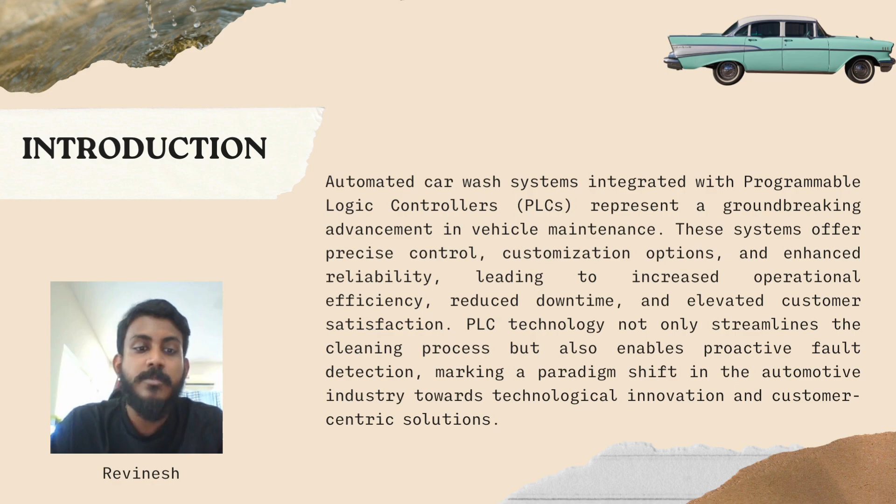PLC technology not only streamlines the cleaning process but also enables proactive fault detection, marking a paradigm shift in the automotive industry towards technological innovation and customer-centric solutions. Now I'll be talking about the problem statement of this system and scope of study.

For the problem statement, develop an automated vehicle car wash system with PLC integration for better performance and reliability. Goals: optimizing throughput, minimizing downtime, reducing water usage without compromising quality. Opportunity for expertise in PLC-based control systems, supporting future advancements. The project addresses technological challenges and promotes sustainability in car maintenance.

For the objective: to develop an automatic car wash program to increase the car wash efficiency, to reduce water usage during car wash, to learn how to control the operation of the automatic car wash using programmable logic controller, to study and understand the programmable logic controller system of the automatic car wash.

For scope of studies, design and program an automated car wash system for three car sizes: small, medium, large, with different operating times. The phases are pre-soaking, soap, brushing, rinsing, and drying, each controlled by timers for sequential operation. Safety measures: preventing unauthorized conveyor belt operation with sensor activation and car presence detection.

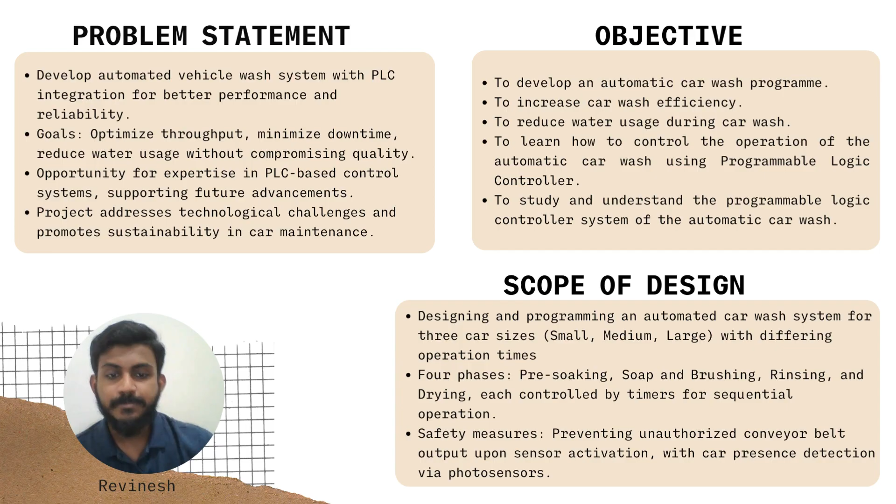These are the capabilities of the proposed design. Select mode of car wash depending on the car size. Start conveyor belt, emergency stop conveyor belt, activate soap water, clean water, and dryer independently, and activate brushing.

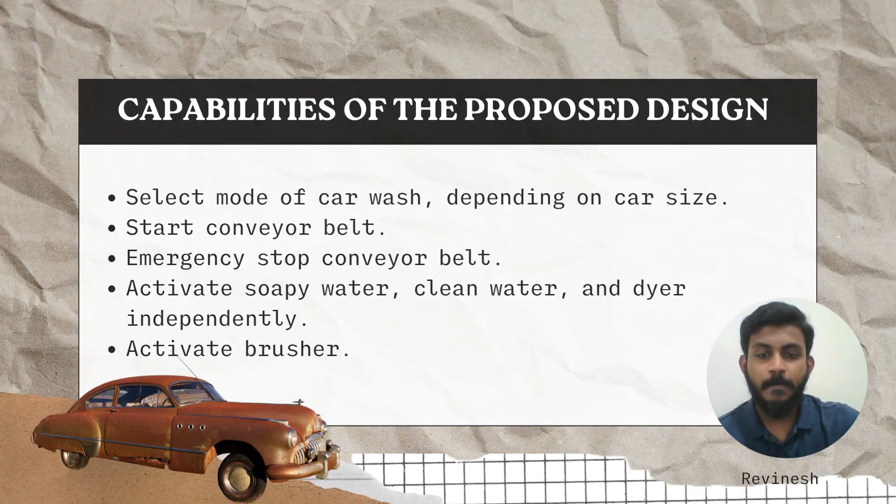The literature review is separated into two parts: research on existing car wash and PLC. The first three journal articles talk about using PLC for automated car wash. The first author, M. Bakar and others, utilizes PLC to move the conveyor belt, washing, dry cleaning, and drying the car. The conveyor belt will move when it detects a car at the entrance, and the conveyor belt will stop when the sensor detects the car. This car wash is separated into three sections, which are washing, cleaning, and drying.

The second author, Yu and others, used PLC to automate the pre-wash, foam water, rinsing, brushing, and drying by using sensors and timer. The car has to drive into the car wash to start the process as all of the process happens in the same section. For the third journal article, similar to the first author, it has the same process, but with additional processes of rinsing the car with water first before applying soap and brushing the car.

Okay, now I will talk about PLC, including PLC components, its operation, and the ladder diagram elements used for this project. A PLC system consists of a CPU, which is the brain of the PLC, to store data and execute the control program. A power supply to provide necessary power to the PLC and components. An input/output section, or I/O section, is where the PLC interfaces with the external world. Input modules receive signals from input devices and output modules send the signals to output devices.

A programming device is needed as the main usage to enter the desired program into the CPU's memory. Nowadays modern PLCs use ladder logic or function blocks for the programming device. And then a timer could be added in a PLC, which allows the control logic to be carried out according to schedules or delays.

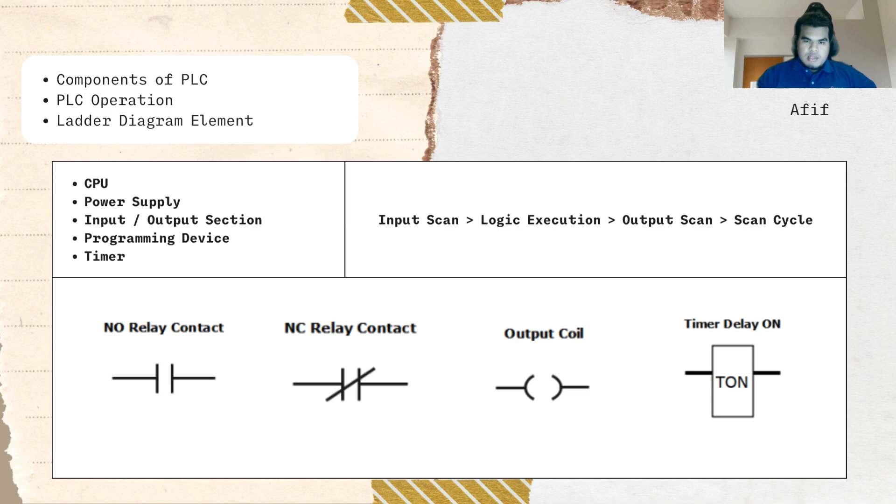The major input components used are the start push button, the photo sensor, emergency stop button, and a programmable logic controller, in short, PLC. First, the start button will kickstart the entire car wash process with a single press. Once activated, it sends a signal to the PLC, triggering a sequence of operations including conveyor movement, water sprayer, brushing, and a drying phase.

Next is the photo sensor. It ensures the system activates a washing sequence when the car is correctly positioned. In the case of emergencies, the emergency stop button is crucial. This button provides an immediate means of halting the entire car wash process. It will override all other commands, ensuring the safety of both the vehicle and any personnel nearby. Lastly is the programmable logic controller, PLC.

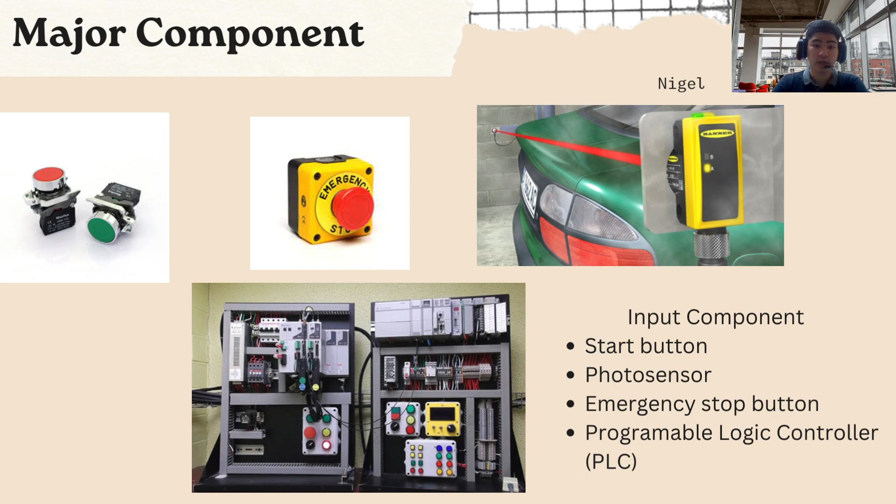This device acts as the brain of the operation, receiving input signals from the start button, photo sensor, and emergency stop button. It then controls various outputs such as the conveyor, water pumps, brusher, and dryer system. These major input components work seamlessly together to automate the car wash process. Next is the output component.

The conveyor is an essential component that moves the car through different stations of the wash cycle. Controlled by the PLC, it ensures the car moves at the correct speed, allowing adequate time for each cleaning phase. Next, the clean water is delivered by a centrifugal pump. This pump efficiently delivers clean water to spray nozzles for rinsing the car, followed by a diaphragm pump.

It's selected for the spray of soapy water for its ability to handle the abrasive nature of soapy water and its precise control over flow rate, ensuring optimal soap mixture usage. Now onto the brush. The rotary brush is controlled by the PLC to adjust its speed and pressure based on the cleaning cycle phase, ensuring effective and safe cleaning of the vehicle's surface.

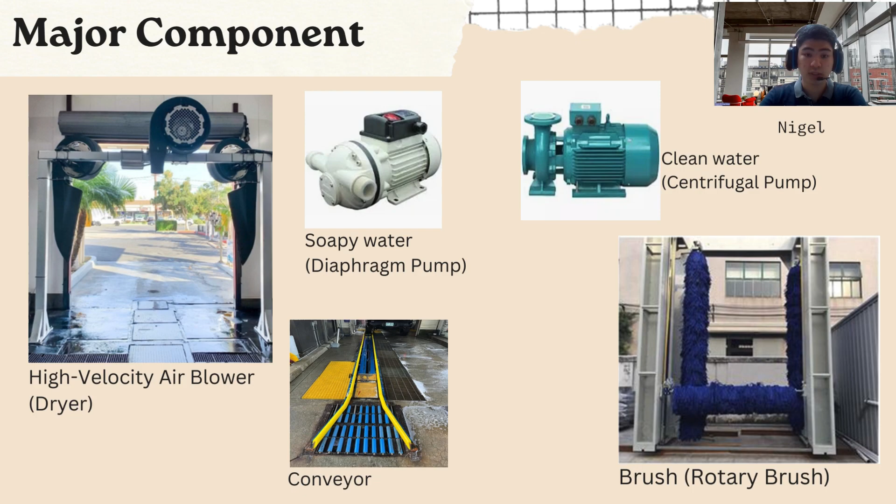Lastly is the high velocity air blower. The NCS air knife drying system is preferred as it utilizes airflow to remove water droplets without physical contact, reducing the risk of harming the car's paintwork. Next slide, I will explain the system design.

As our system design is to be in a straight line, the car wash system is controlled by a PLC. The PLC receives signals from sensors and switches, and then it sends signals to control the various car wash equipment. The PLC program is designed to sequence the operation of the car wash equipment automatically.

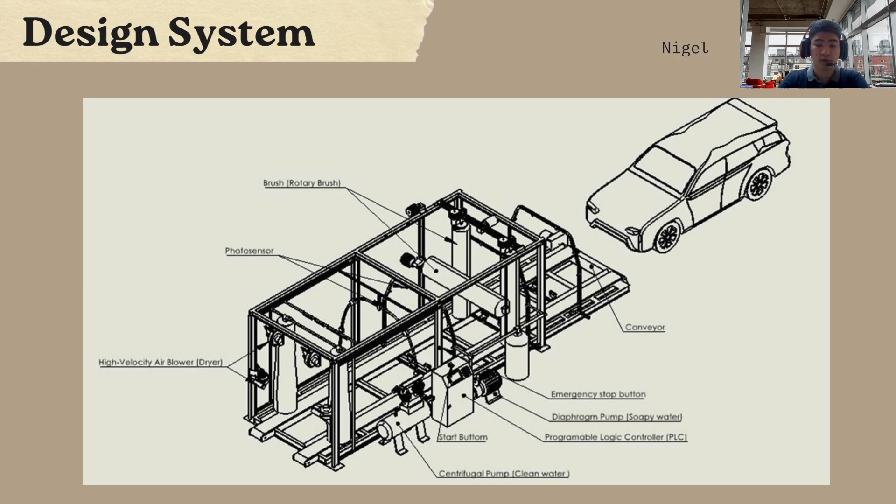After that, this process will start. For the first stage, there will be a photo sensor that detects the vehicle arriving at the first station. Once the vehicle arrives, the vehicle will be sprayed with water and cleaned. Then it will be sent to the next station after the process ends after a certain amount of time. That will repeat for the second station, where it is soaked and brushed one after the other.

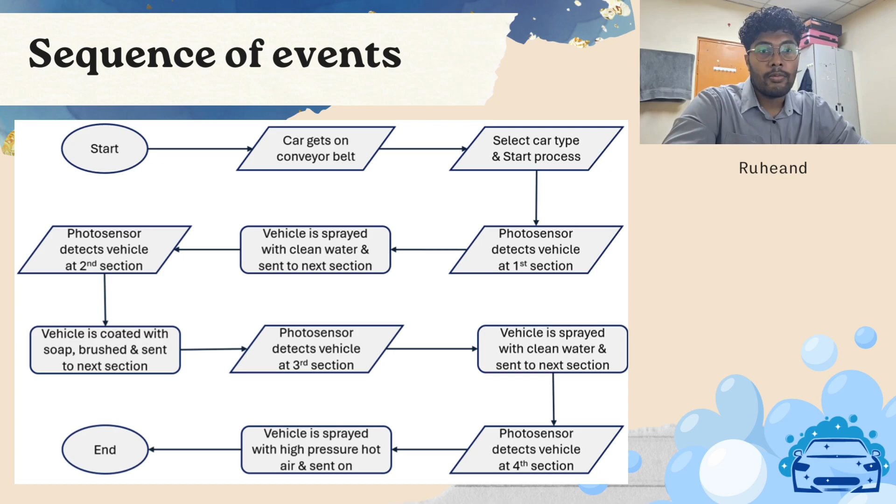And then after the timer is complete, we'll move on to the next section, which is to wash off the soap water. And then proceed to the fourth section, where the car is dried. And then the system will end. I'll explain further on how the sensors work and how they're activated in the system block diagram. And throughout the system, there's also an emergency stop button that's active, which if we press that button, the whole sequence will stop immediately. Alright, now allow me to explain the system block diagram.

For this, we can see that there are many components attached to the programmable logic controller, which serves as the main component of the system. There are a few inputs to it, which include a power supply that powers the whole system. We have a vehicle selection criteria, which allows us to select the vehicle. We have emergency stop, which will stop the entire system immediately if it is pressed. And we have 4 proximity sensors as well, located at each of the sections of the system.

We also have 5 relays that are outputs of the programmable logic controller. The signal sent out from the PLC would then activate the sections through the relays. So relay 1 is the conveyor belt motor. This relay would activate the motor to move the car from one section to the other, from section 1 to section 2 to section 3. So this one will be on in the middle of each section to transport the car.

Relays 2, 3, 4, and 5 are all sections of the system, which are washing the car, soaping and brushing the car, washing the car again, and then drying the car. That explains the system block diagram, and I'll hand it to the next person to explain the next part.

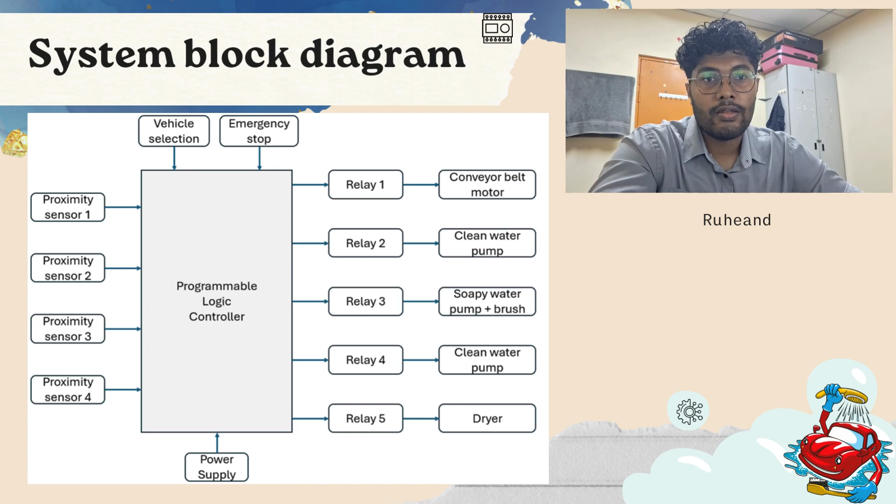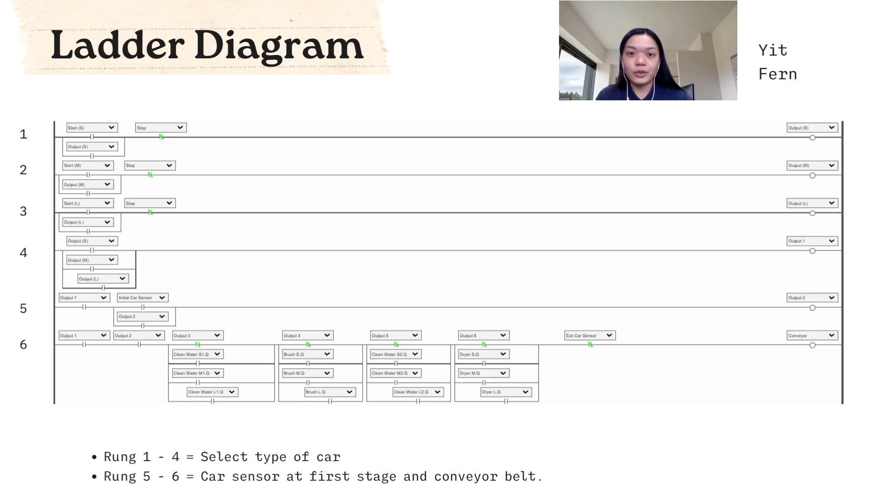For the ladder diagram, rung 1 to rung 4 is the selection of type of cars, either it is S, M, or L, which means small, medium, and large. Rung 5 and 6 is the output of the conveyor belt. If all of the switches turn on, the conveyor belt will move. It will stop when the switches are turned off.

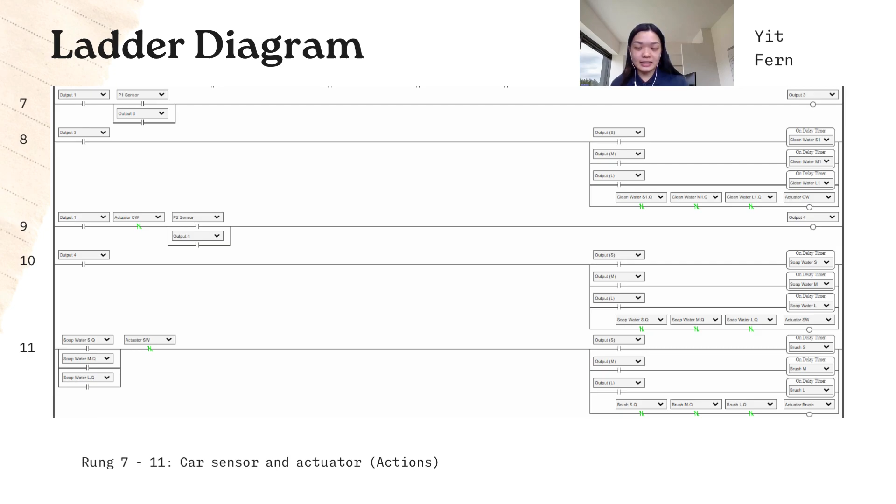For rung 7 to 11, it is the output actuator for clean water and soapy water with brush. It will activate when the sensor detects the car. Similar to rung 7 to 11, rung 12 to 15 is the output actuator for rinsing with clean water and drying process. Rung 16 and 17 is when the car exits the car wash, and it will repeat the selection of type of cars.

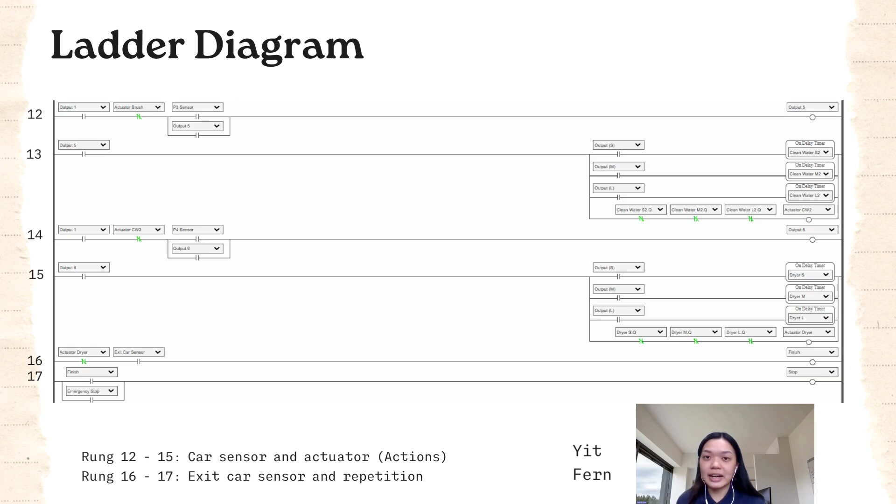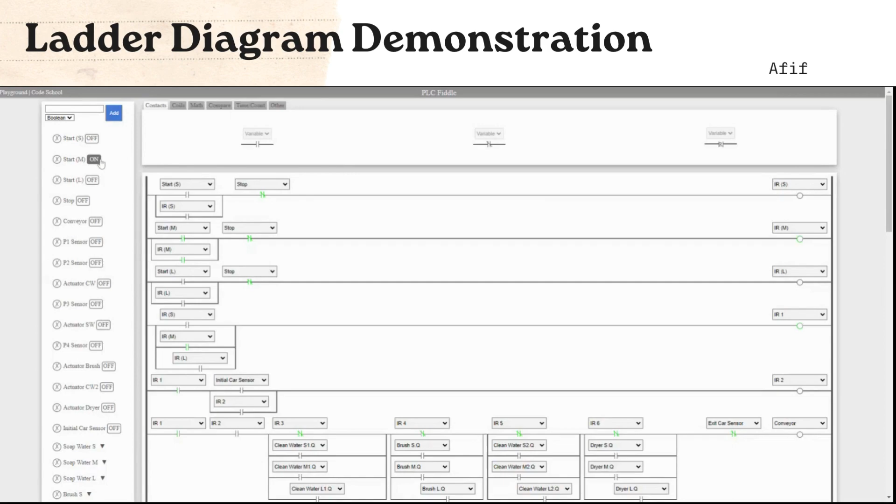Okay, now for the demonstration, we will start by choosing either one output of the three sizes, either small, medium, or large. So we will go with medium. So we turn on the start button for medium. So you can see rung 2, switch medium is closed.

So if we activate internal relay for medium, then internal relay for medium will activate rung 4. So you can see here, and that will activate internal relay 1. Internal relay 1 will go through to the next rung to activate internal relay 2. However, the first car sensor needs to detect the car. When the car is detected, it will turn on. The circuit is closed. So internal relay 2 will be activated.

So moving to the next rung, internal relay 1 and internal relay 2 need to activate together to activate the conveyor. So the conveyor will bring the car until it reaches P1 sensor. So when P1 sensor detects the car, the rung will be activated and internal relay 3 will be activated. When internal relay 3 is activated, it will activate the actuator for clean water here.

So there's a timer until the actuator of clean water is closed. As you can see here, it is turned on. So we will wait until phase 1 is finished. At the same time, you will see the conveyor is off. So that means the car is stopped.

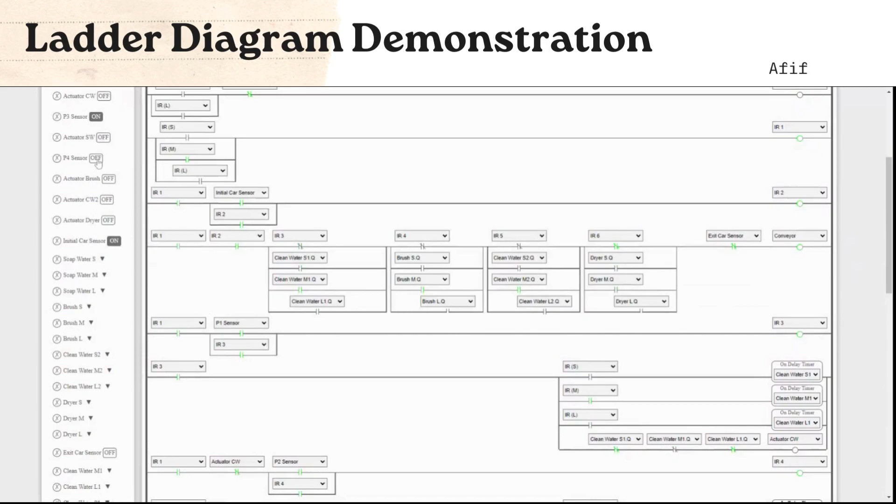Okay, so when the actuator of the clean water has finished operation, the next rung is activated the same way, and the conveyor will be turned on until the car reaches P4 sensor, and when the P4 sensor is activated, it turns on. So internal relay 6 is activated, and the same as before, actuator of the dryer will be activated until it is finished.

So as you can see in the next rung, actuator of dryer needs to finish operation first, and the exit car sensor needs to be activated for the operation to finish. So right now when the actuator dryer is activated, the switch is open, so the rung is not activated.

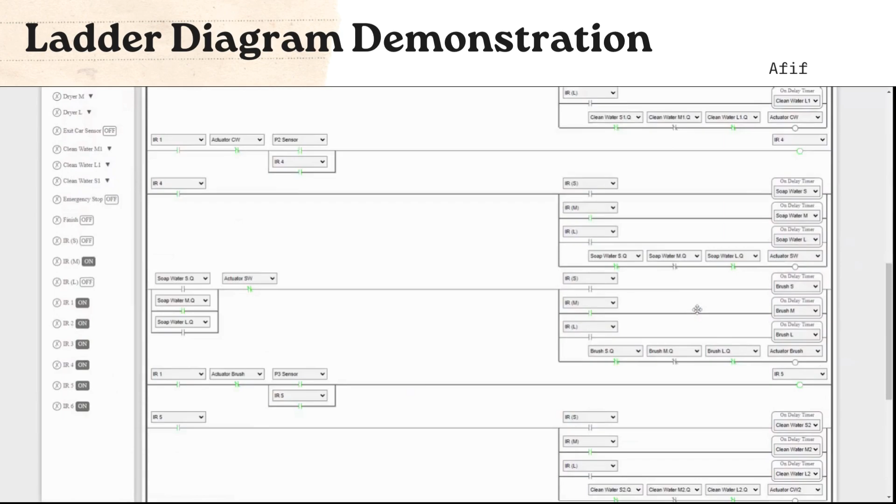Okay, so the actuator dryer has finished operation. So now its switch is closed, and the conveyor moves again until the car exits. So when the car exits, the sensor will sense the car and turn on.

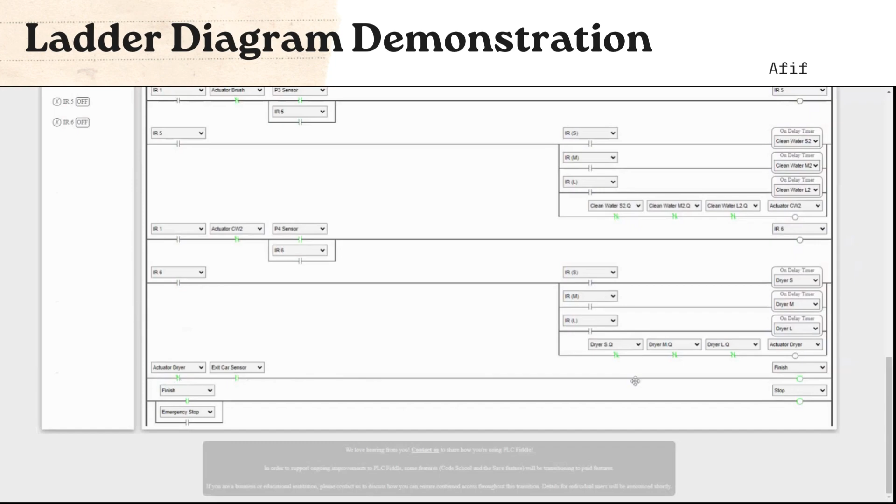Okay, so this rung will be activated and it will finish the operation, and the finish switch is closed and the stop button is activated, and it will stop the operation from the first stage, which is the internal relay of medium. So as you can see here, the start button is still on. However, the stop button is open. So the whole operation has been stopped. That's all for the demo.